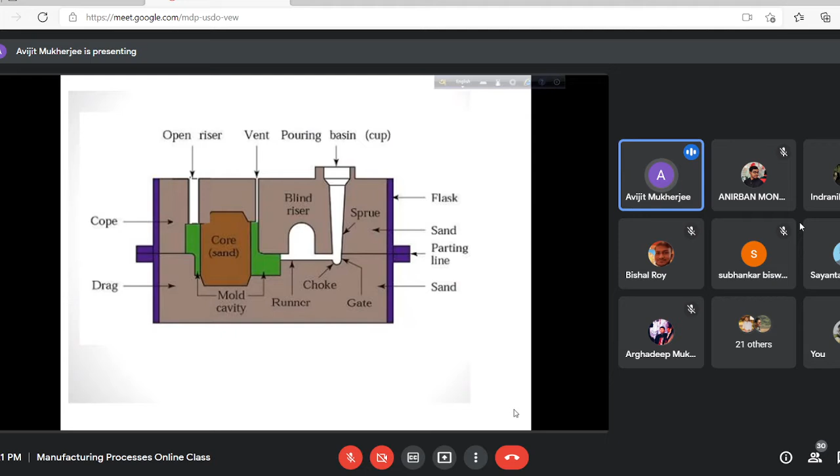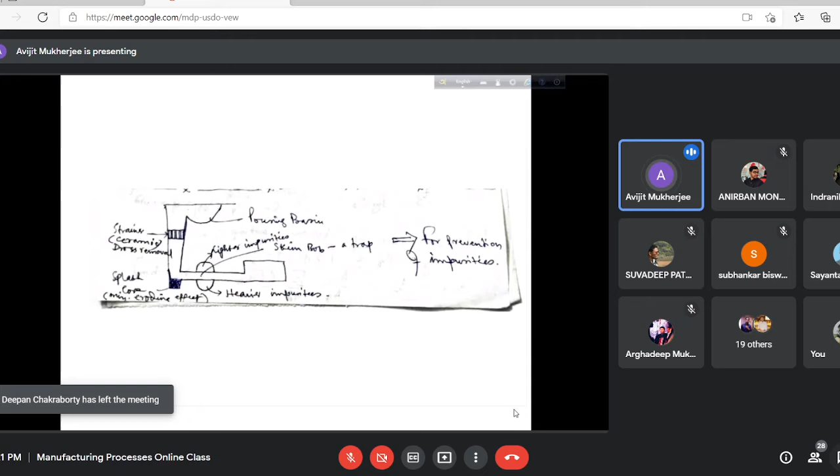So in the last class, most likely, we had mentioned about a figure of gate, is it not? Pouring basin, down gate, ceramic strainer, splash core, skim bob, or whether those were discussed. Yes sir, so one figure was there. So quickly we may also go through that figure. This figure was discussed: the pouring basin, down gate, there is a strainer or ceramic dross removal system.

Dross means oxide, layer of oxide scales, nitride oxide, sulfur oxide, etc. Splash core is provided to avoid the erosion. This is the sprue base well. This is known as this one.

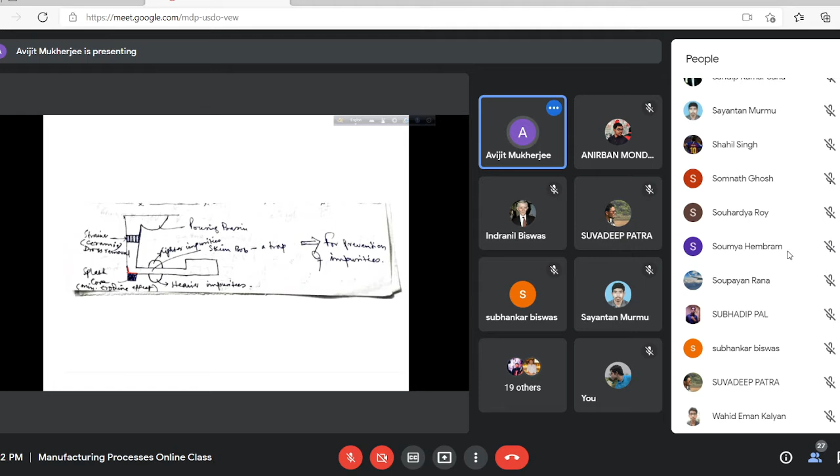Now, if there is a sharp corner, then this portion may be damaged when the molten metal is poured from an elevated height. So it will have a velocity and pressure also. That velocity and pressure will wash out all these particles.

Sand erosion, like say a river bank is eroded by the flow of water in the river. So we provide a splash core. This will minimize the eroding effect, and also during the design, this sharp corner should not be there. So all these sharp corners must have to be curved, so filleting is needed.

At this particular portion, this horizontal part is actually the runner. This is actually the runner, but this is the down gate. This horizontal portion is actually the runner, and there is a trap, a metal trap.

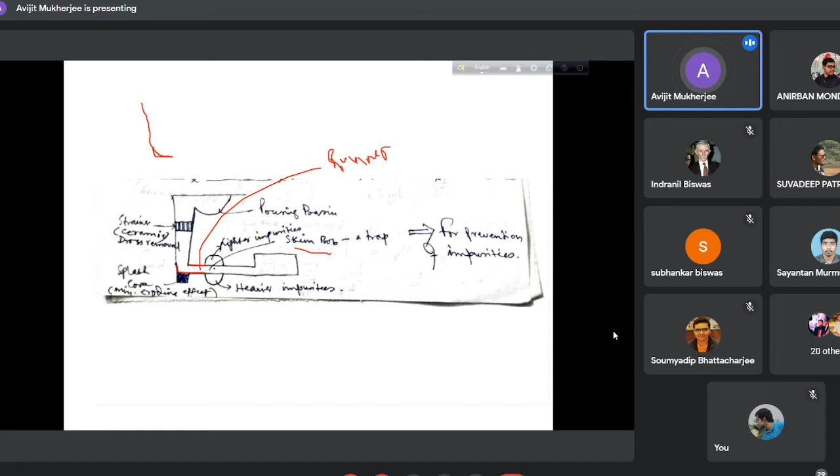It means some lighter impurities will be floated on the upside, whereas the heavier impurities will be deposited on the downside. So this is half circle, another half circle. So this is a skim bob, known as a skim bob. This is a trap of the impurities. Then more purified material is finally entering through this in gate.

This portion is the in gate. So this is the in gate, and this is the cavity. So this is the total gating system.

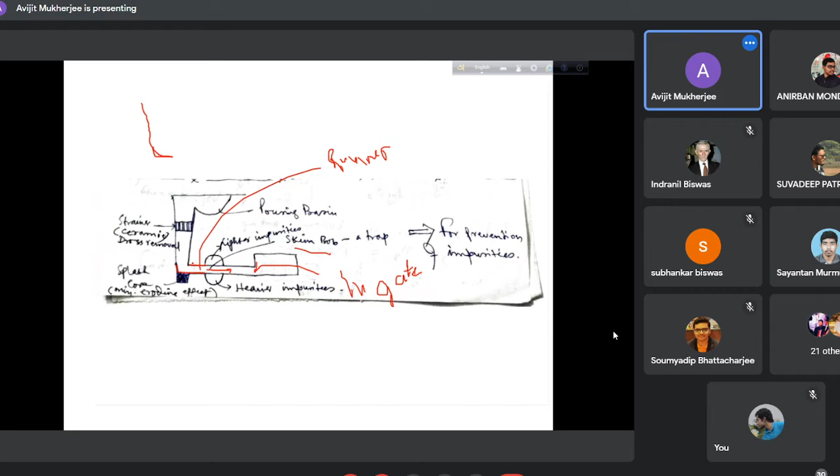But in the figure, when we draw it, we simply label this as a runner, but actually the runner portion is this horizontal one. Okay, so here again a gating system and a riser, mold cavity, all these are shown. There are two boxes, cope and drag, aligned by guide pins, and this is the mold cavity, green color, where a core is there.

What is core again? Today we shall discuss. And this is the pouring basin or cup, down gate or sprue, and there is the sprue base well, also known as sprue base well, where there are the splash core and all these ceramic strainer. This is not shown here. We may have a skim bob here also, which is also not shown, but separately we had discussed.

There is a ceramic strainer, there is a splash core, and there is a skim bob.

For simplicity, we don't draw all these in a single diagram. But if asked to discuss the gating system with a neat figure, you will have to discuss this part: pouring basin or cup, down gate or sprue, ceramic strainer, splash core, sprue base well, and this is the skim bob. Then finally, the ingate.

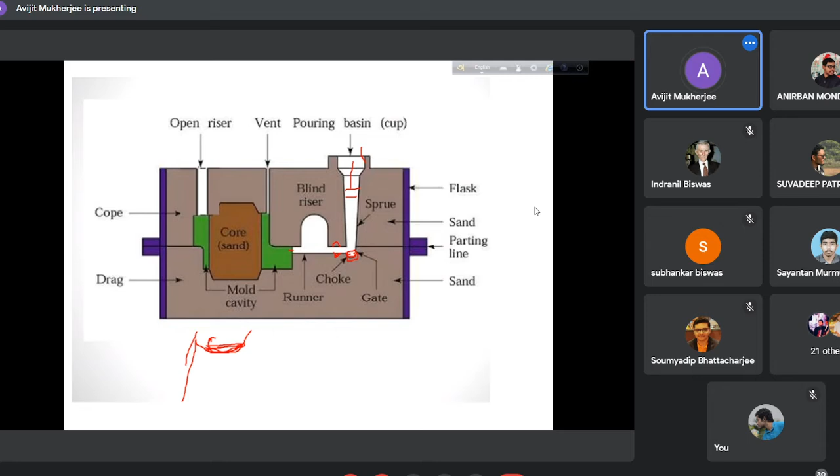Comparatively pure metal will flow here. Then oxide scales will be arrested here, and more pure metal will enter. Again, if some impurities are still there, those will be arrested in this choke area, the sprue base well. But we also provide a splash core in this well—prepared separately using core making sand and placed here—to avoid the eroding effect.

So why is this cup shape always provided? Just to pour the molten metal in the cup so that heavier impurities can be settled. If you pour directly through this space, it will directly come to this area, which is not desirable. That's why I always pour the molten metal in the cup area, and that's why the cup shape is provided.

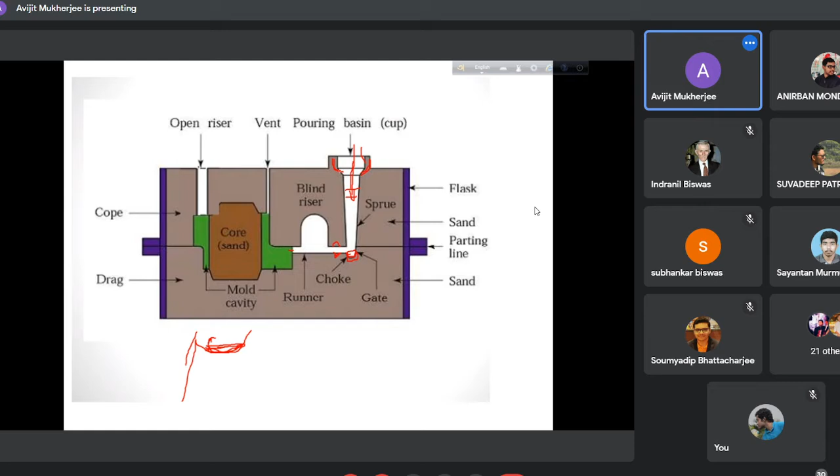In the workshop video, or in the workshops where you are going right now, you will also produce this cup shape, a funnel shape. Now, what is a gate actually? Gate is the passage, the entry point through which the molten metal finally enters into the cavity. That is the gating system, and as we have already discussed, it includes pouring basin, runner, gates, that is ingates, etc.

And these are some important points desired out of a good gating system. What is the requirement? Metal should flow smoothly, because when metal is poured, it will have turbulence. Do you know what turbulence is? If you open a tap in a water basin, a whirling motion will be generated—that is turbulence.

Similarly, if I pour molten metal into the cup or basin, a whirling effect or turbulence will be generated. And if turbulence is there, air or other gases will be entrapped in the molten metal, and finally that will go to the mold cavity, causing various defects due to the dissolved gases.

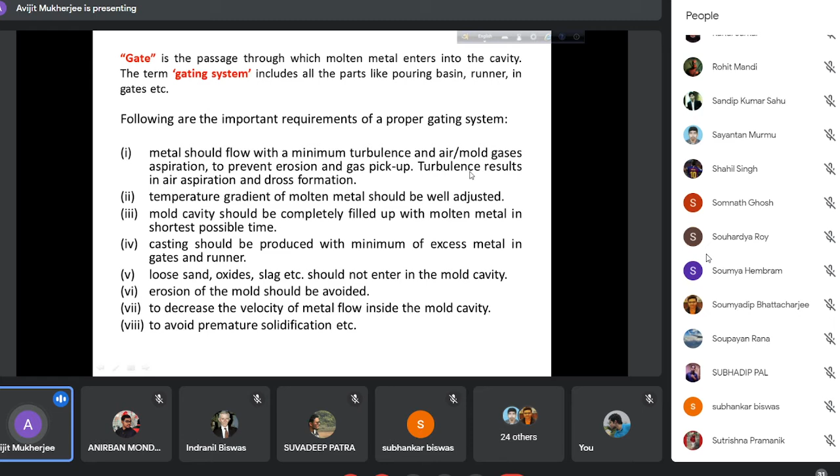Today again we shall discuss the defects. The gate should be designed in such a manner so that turbulence is minimized. Also, erosion is to be prevented, and gas pickup, that is, no extra gas from outside environment should be infused with the molten metal, because turbulence results in air aspiration and dross formation. So these are the requirements of a good gating system.

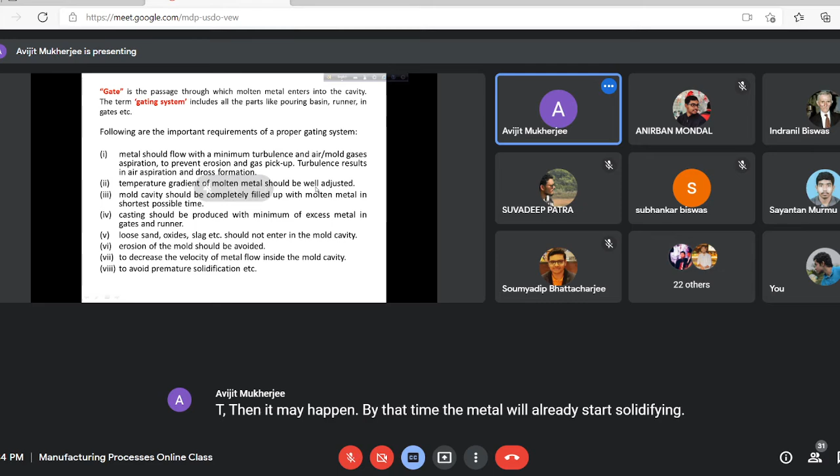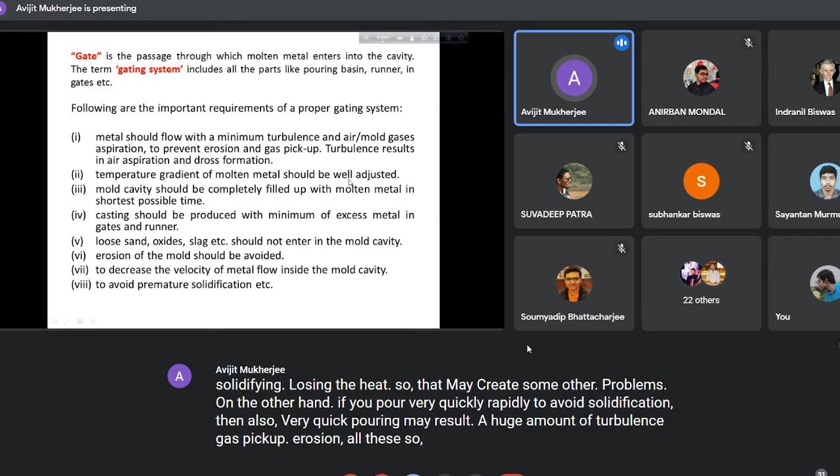Second requirement, temperature gradient of molten metal should be well adjusted. If you pour the molten metal very slowly, then the turbulence will be reduced and chance of erosion will be reduced. But if you take long time to fill the cavity, then by that time the metal may already start solidifying, losing the heat, which may create other problems. On the other hand, if you pour very quickly to avoid solidification, it may result in a huge amount of turbulence, gas pickup, and erosion. So there should be a balance. This is the concept of temperature gradient. The gate should be so designed that this temperature gradient is maintained, that is, not too fast pouring, not too slow pouring - an optimum.

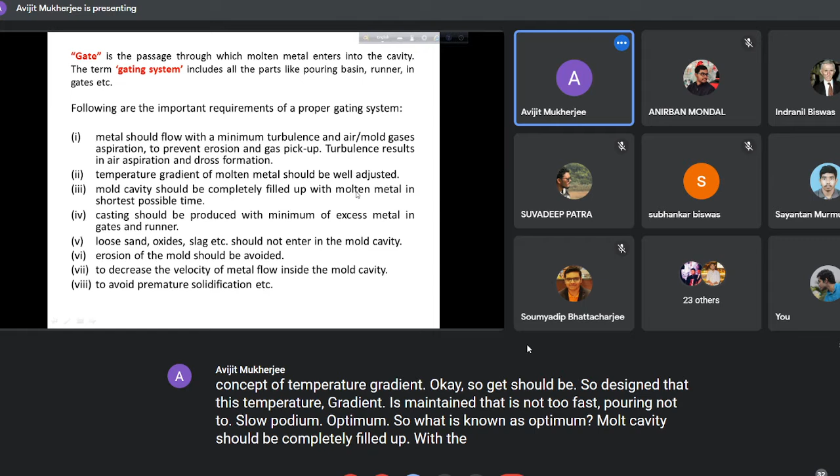Mold cavity should be completely filled up with the molten metal in shortest possible time, but not too fast, because if it is poured very rapidly, other problems like turbulence and erosion will be there.

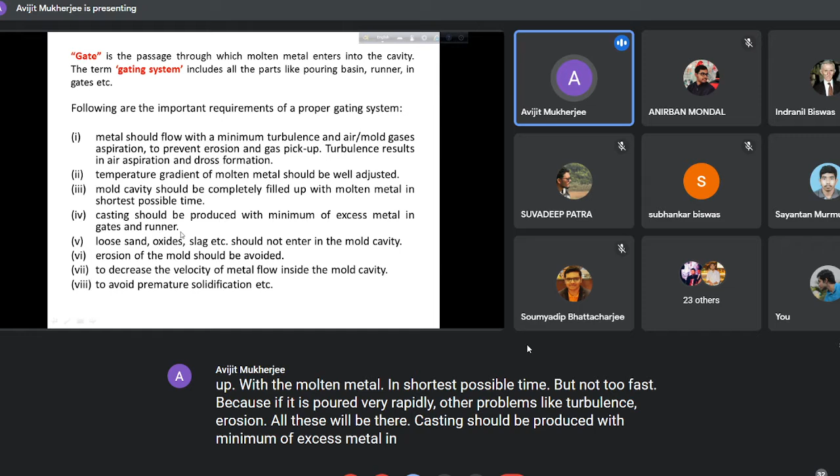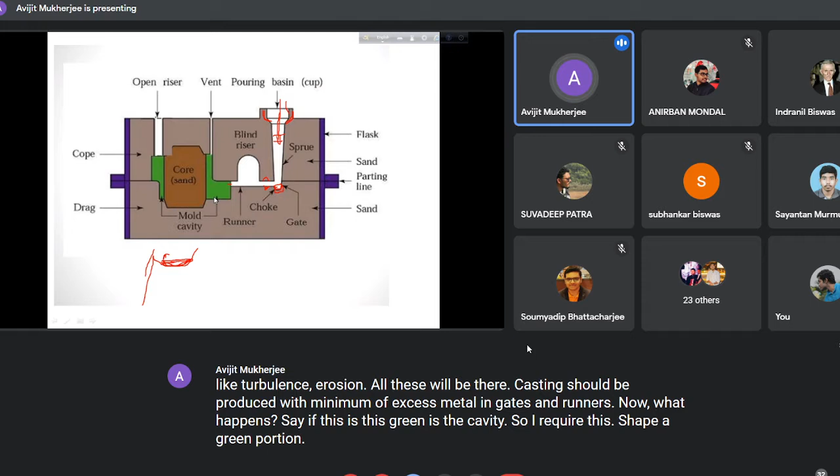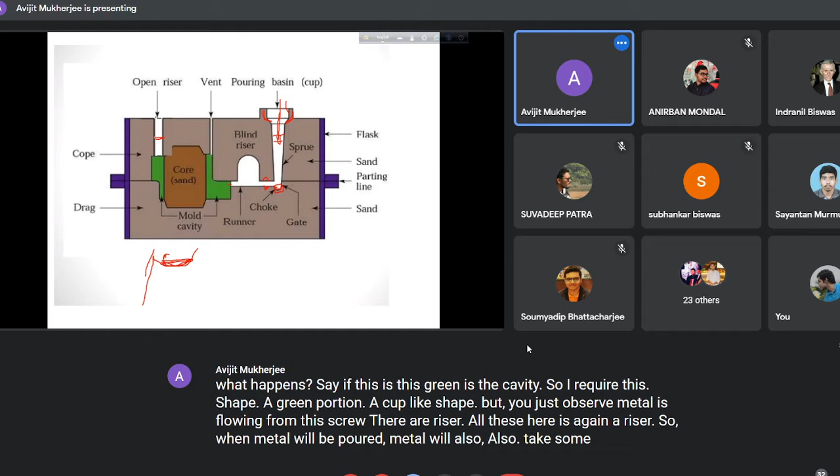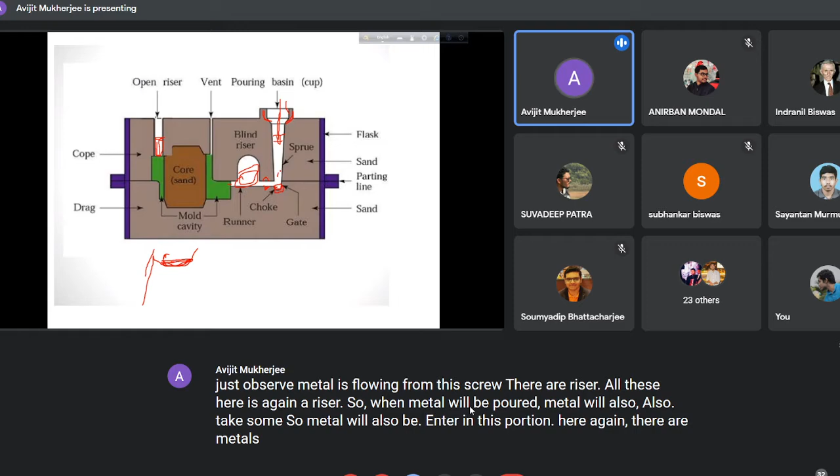Casting should be produced with minimum of excess metal in gates and runners. Now what happens, say if this green is the cavity, I require this cup-like shape. But metal is flowing from this sprue, there are risers, all these. So when metal is poured, it will also enter these portions. So after solidification, along with the main green shape, some other protruded portions will be there, due to riser, gates, etc. So the point is, casting should be produced with minimum of excess metal in gates and runner - it will be there, but it should be minimum.

So after solidification, after the cast is taken out, it will have to be cleaned, breaking the extra material, removing the excess layer of metal, and there are techniques for that.

Then gate should be designed so that loose sand, oxides, slag - slag means where impurities are dissolved and it will float on the molten metal - should not enter into the cavity. For that, we are designing the gate. We have already discussed there are strainers to remove oxide, loose sand and other impurities, which can be minimized just by providing a pouring basin or cup. In the sprue base well, erosion effect will be avoided. There is a skim bob to trap lighter and heavier impurities. So these are the requirements.

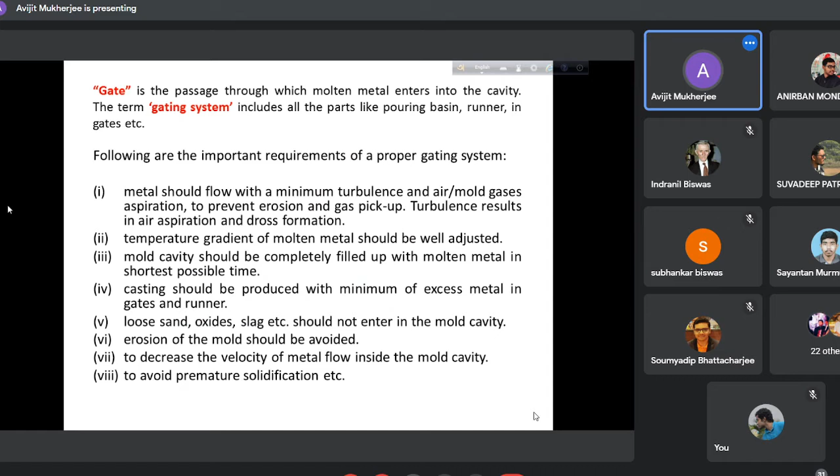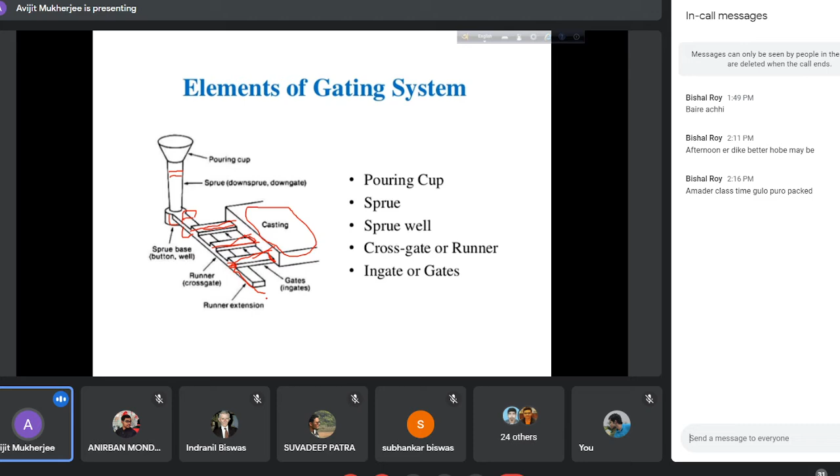Metal is coming, but it may happen, not necessarily. Sometimes this portion may have a gap, a minor gap, so metal will flow totally through this portion but partially this may become void. So if you extend this portion, metal will flow throughout this cavity and easily this channel will be completely filled with molten metal. Otherwise, if it is constrained up to this portion, the total ingate may not be fulfilled, or the flow may be minimized to some extent. That's why this is having some extension.

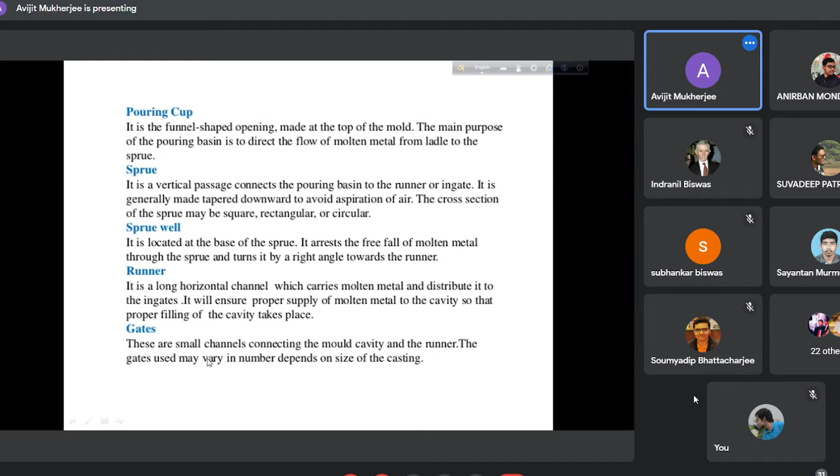So these are again some discussion, all these had been discussed. We have discussed this thing. Now, depending on the position where the gates are provided, there are different types of nomenclature, like a horizontal gating system and vertical gating system.

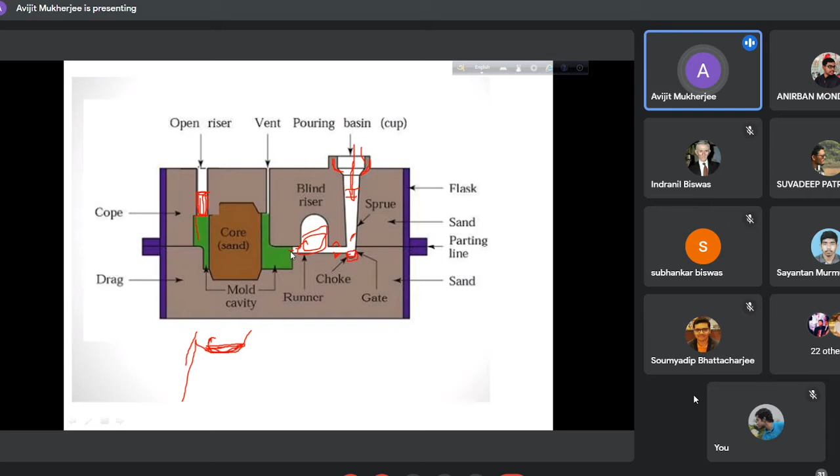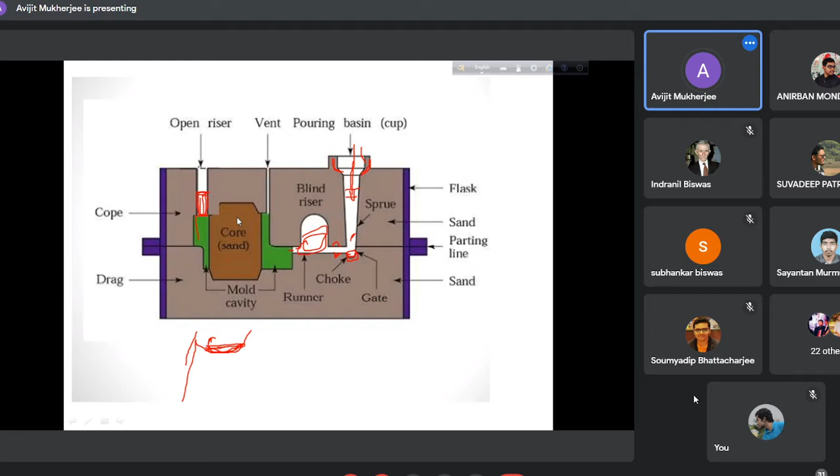This is horizontal gating system because metal is entering horizontally. On the other hand, if this is considered, again this is horizontal, not vertical - metal is entering horizontally here. But sometimes metal may be poured directly from the top, not in this figure, in some other cases. That is the vertical gating system. So depending on the position or orientation, it may be either horizontal or vertical gating system.

And you know what is parting plane. If I have cope and drag, say cope half and drag half, then this plane is known as parting plane. So if the gate is provided horizontal to the parting plane, that is horizontal gating. On the other hand, if the gate is provided vertically, it is entering vertically. So with respect to the parting plane, either horizontal or vertical.

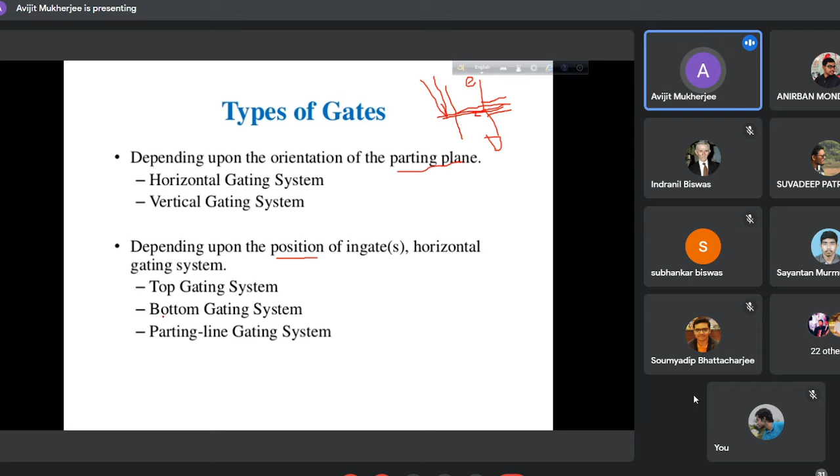And also, depending on the position, it may be top gate, bottom gate, or parting gate. What is that? Say this is the mold cavity, and metal is flowing or entering from the top. This is the pouring basin, down gate, sprue base well, and it is entering in the cavity from the top. This is the parting plane, so it is entering at top - that's why this is known as top gate.

Sometimes this may also be the figure - top gate, this is horizontal, that is vertical, it can be a vertical gate. But this is not desirable sometimes. So this is top gate because it is entering the cavity from the top of the parting plane.

Here, same figure, same arrangement, but metal is entering from the bottom - so that's why this is bottom gate. And here again, same cavity, but metal is entering at the midpoint, at the parting plane. This is the parting plane, if it is divided in two equal halves - cope half, drag half. So the gate entry point is provided here at the parting line, so this is known as parting gate.

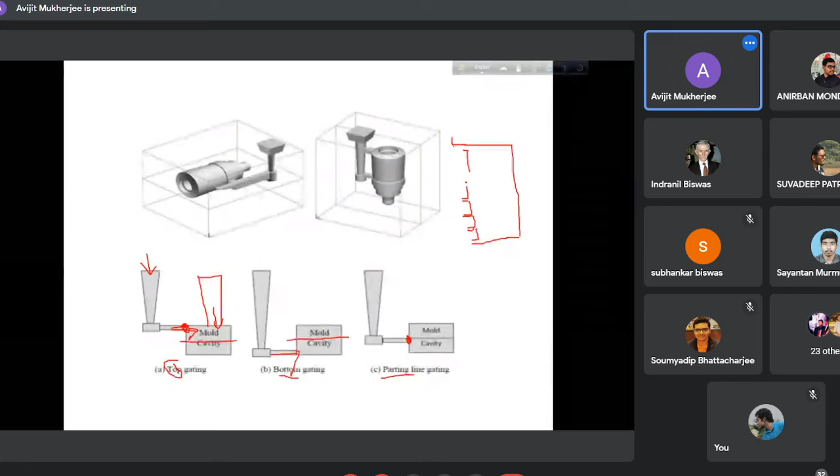So, if the thickness of the casting is very large, then only top gate, or only bottom gate, or only parting plane gate may not fill the cavity very systematically. In that case, a number of ingates are provided throughout the height of the job or cavity. That is the concept of step gates, like the steps of a staircase - so these are known as step gates.

So we have top gate, bottom gate, parting gate or parting line gate, and step gate.

So, after solidification, how does it look like? This is the gating system, mold cavity. So when the metal will be solidified, all these portions we shall discuss with a figure. Just a minute.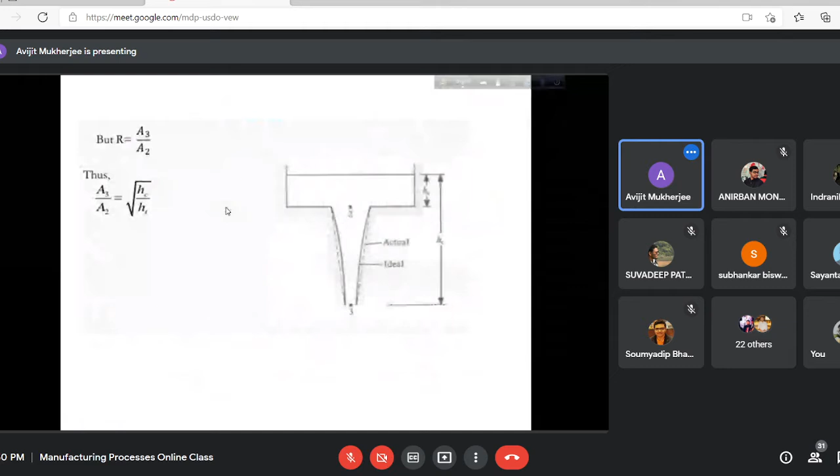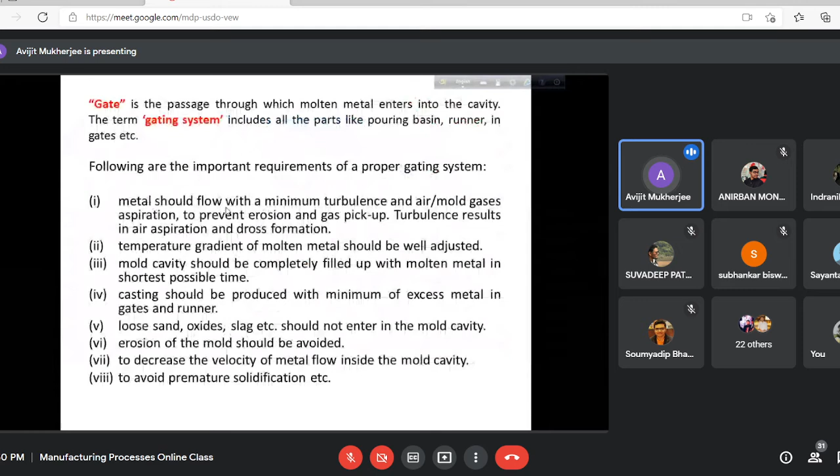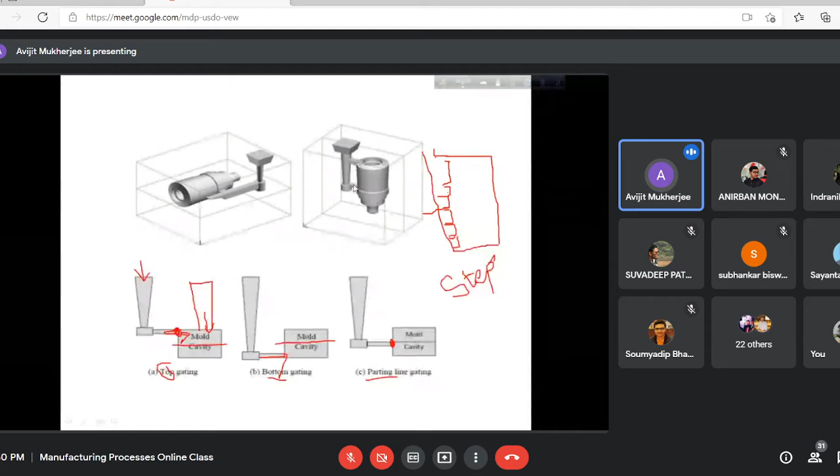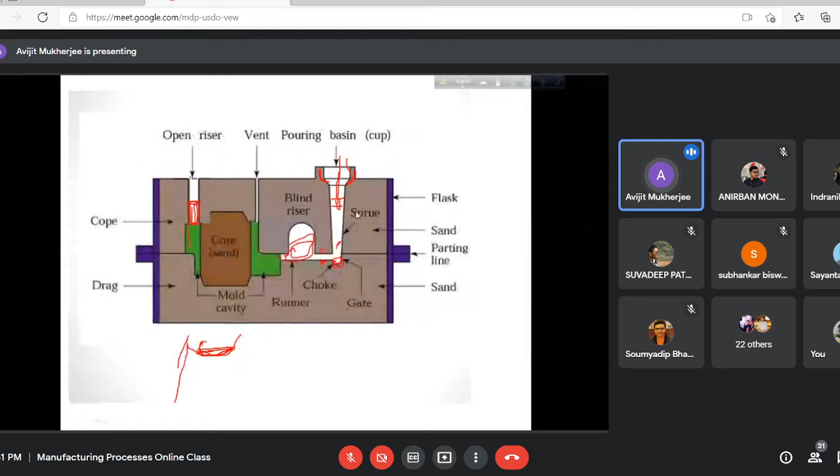And again, we have a concept known as gating ratio. Gating ratio is nothing but AC is to AR is to AG. What are those? It is the area of the sprue base well, or choke. Just remember the choke here, sprue base well. Cross sectional area of this sprue base well or choke is to AR, total cross sectional area of the runner.

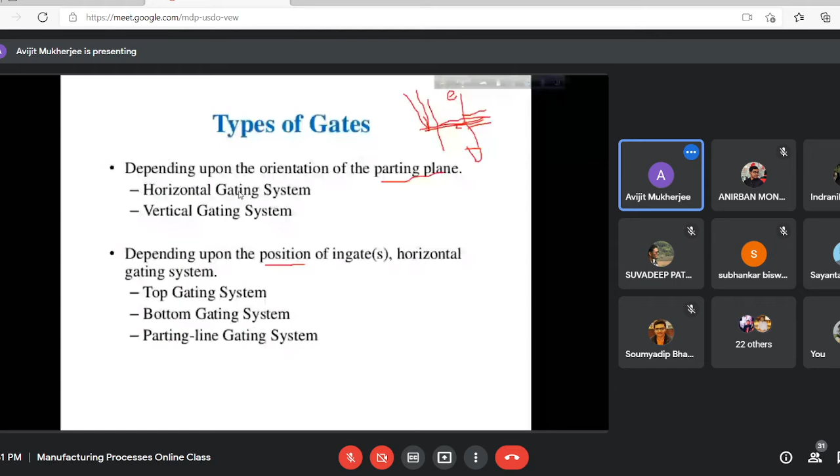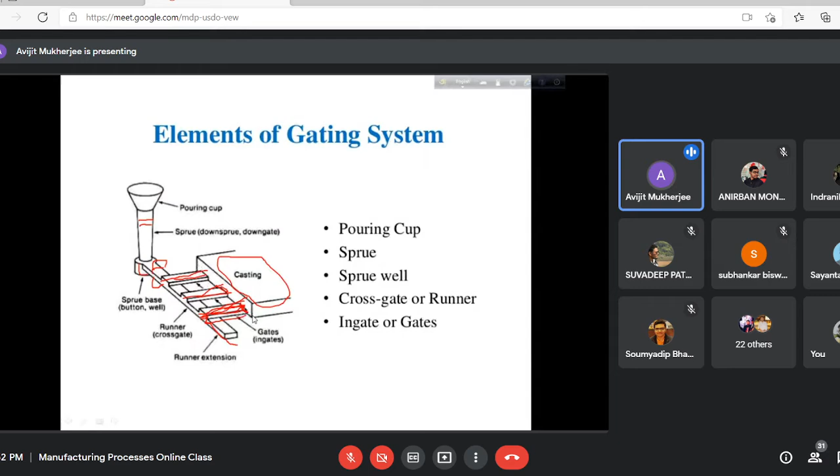Total, not a single. Choke area is a cup like shape. So cross sectional area of the choke is to cross sectional area of the total runner is to total ingate, cross sectional area of the total ingate. If I have three ingates, each having cross sectional area small a, so 3a will be the ingate area. So this ratio is the total choke area is to total runner area is to total ingate area.

And what is the meaning? If the ratio is like this, say total choke area 1, total runner area 2, total gate area 1, or 1, 0.75, 0.5, this is a pressurized gating system. Pressurized means you observe the in-gate area is 0.5, but on the back side of this in-gate there is runner and choke where area is much higher. So more metal is accumulated, and they are applying pressure on the smaller in-gate area. So that is pressurized gating.

So if the total gate area is smaller than its predecessor, that is runner or choke gate, then this is called a pressurized gate. Here also, total in-gate area 1, immediate predecessor, that is runner, is having more cross-sectional area, so these are pressurized gate. On the other hand, if the ratio is 1 is to 3 is to 3, or 1 is to 1 is to 3, this is a non-pressurized or unpressurized gating system. No back pressure is existing.

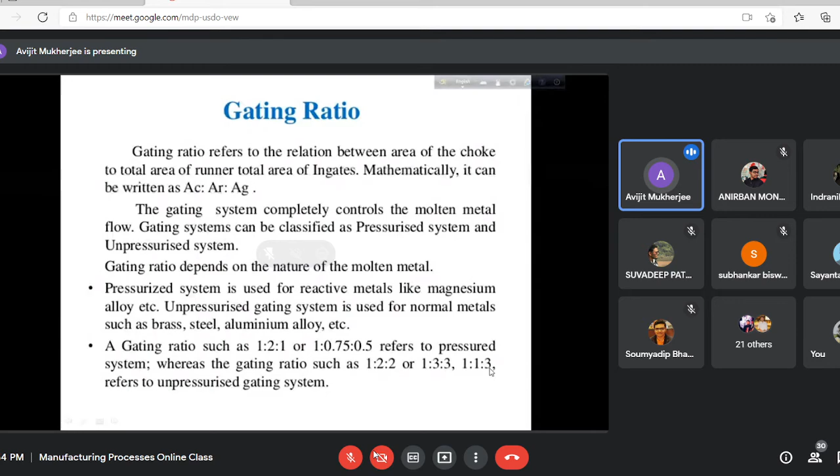So depending on pressurized and unpressurized, what happens? Pressurized gating system is associated with more increased velocity through the gates, but that will ensure the flow of metal very nicely. On the other hand, if it is unpressurized, then the metal may be stuck in the gate, it may not flow very smoothly. And also, whether it is to be unpressurized or pressurized depends on the type of metal.

Normal metals, that is non-ferrous, brass, steel, aluminium, etc., which are normally used, they use unpressurized, that is gates are larger in gate. Whereas some pressurized system is used for magnesium alloy, some reactive material, or some material where it is required to have a pressurized system. So this is nothing but to control the flow of molten metal inside the cavity, pressurized and unpressurized.

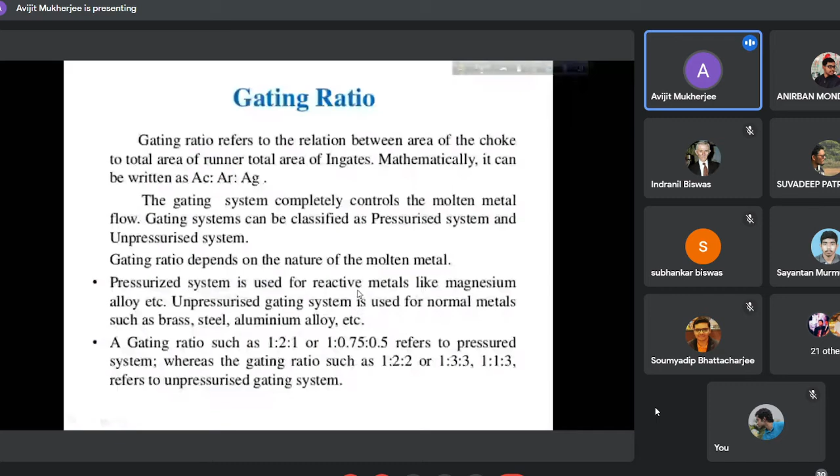So what are some advantages, and these are mentioned. Pressurized controls the flow, unpressurized is a choke control system. In pressurized, metal velocity is high, as I have mentioned, and also turbulence will be there due to high velocity. In case of unpressurized, turbulence is reduced and streamline flow is induced.

Pressurized system consumes less metal because I am forcing metal to enter into the cavity. So these are some advantages and disadvantages. As I have mentioned, in case of unpressurized system, flow is not full because metal will be stacked in front of the gate, it may not flow into various intricate carved portions.

Like the other day, during our centrifugal casting, we had mentioned there was a die casting system where some pumps were used to force metal, and if pumps are used or centrifugal force is applied, the metal will flow to fulfill each and every nook and corner of the shape. Similarly here, if it is a pressurized system, then every nook and corner will be fulfilled by the metal, but if it is unpressurized, it may not be so.

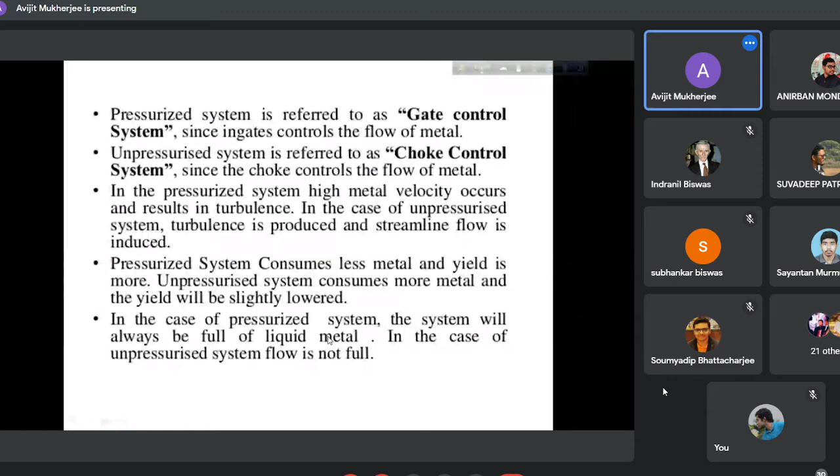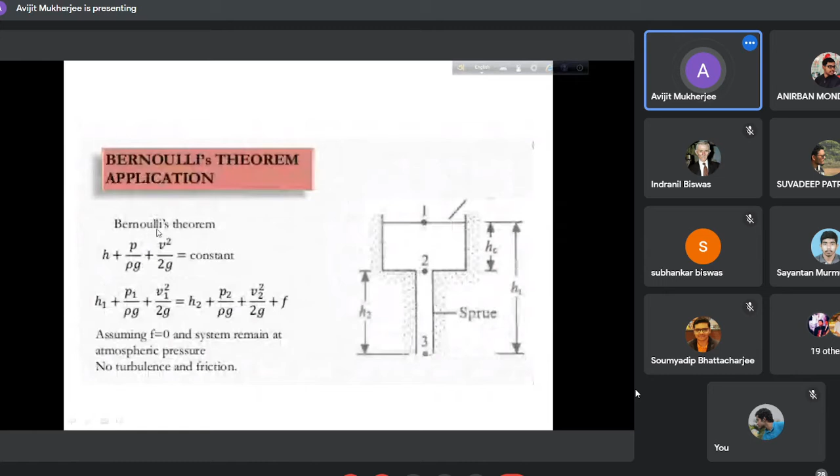Another theorem is continuity of mass flow, that equation. Continuity, because the concept is same amount of volume remains constant. So total fluid entering here at point 1 will remain the same at point 2 and point 3. That is the continuity, volume constancy. Volume remains constant.

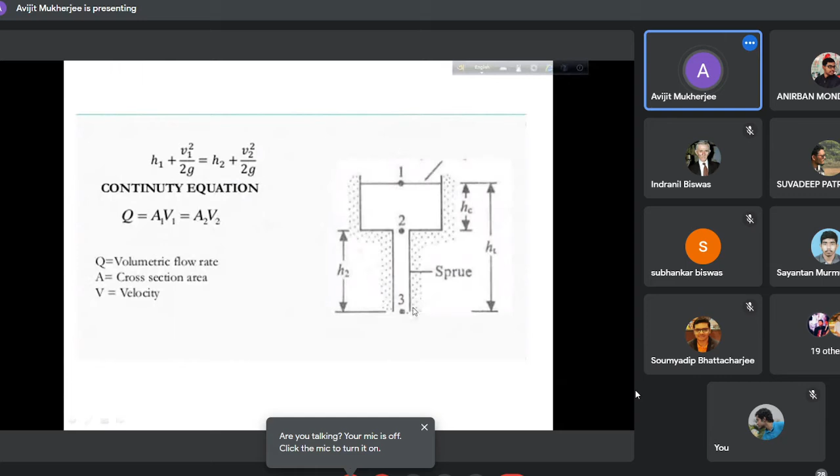So Q is the volumetric flow rate. Volume Q1 equal to Q2, volume at point 1 equal to volume of fluid at point 2. And Q is given by cross-sectional area times its velocity. Cross-sectional area say centimeter square and velocity is centimeter per second. So continuity volume flow rate is centimeter cube per second. That's why the formula is A1 V1 equal to A2 V2 equal to A3 V3 and so on. So this equation is also applicable.

So Bernoulli's theorem, continuity equation, and the same thing applying Bernoulli's equation at 2 and 3 as we have mentioned. If P2 and P3 are not same, then we may obtain all these equations from continuity equations. So in this way, there are so many mathematical juggleries. All these are nothing, we can develop so many mathematical models.

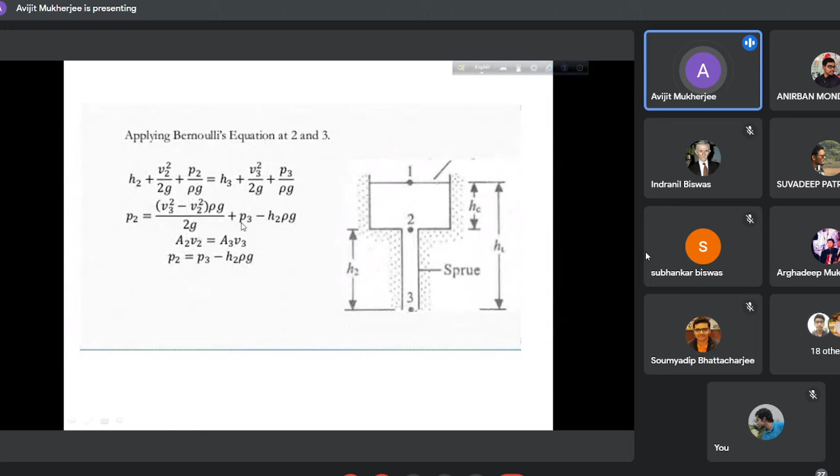Again, same thing. If we consider atmospheric pressure, here P2 and P3 are not considered as atmospheric, so it's different, and accordingly we have developed something. But if P2 equal to P3 equal to atmospheric pressure, then those terms can be removed, and accordingly we may get all these.

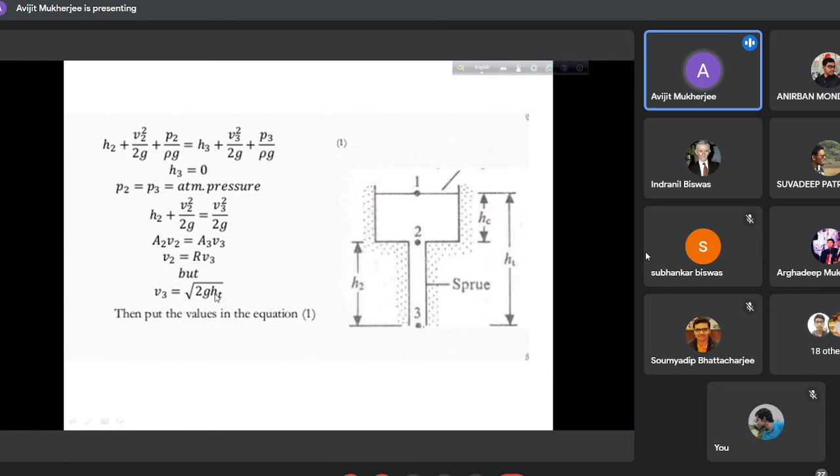So what I would like to say is gate is not a very simple part. There are so many design considerations, but we shall not discuss in detail. Sometime during your third year, fourth year, there will be some projects, major project or minor project in your curriculum. During that case, you may develop something on this, so that is the possibility. Okay, gate design.

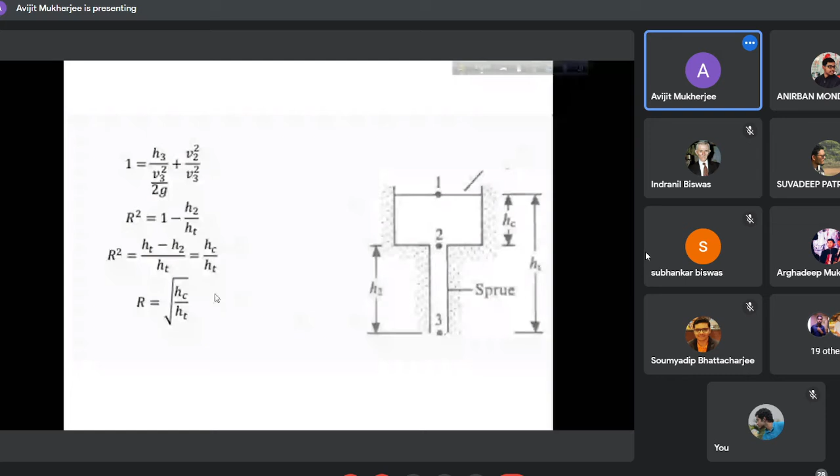Again, all these I am not discussing in detail. Just think, you should remember that during gate design we are considering Bernoulli's energy equation theorem, energy balance, continuity equation, as well as Reynolds number, which is also important. All these are the basis of fluid flow. What is Reynolds number? This is important because it will give you an indication of turbulence. Turbulence is very important to consider, because turbulence may erode the various mold cavity and all these. Air aspiration is also associated with turbulence.

So that's why it is very important, and it is associated with a number known as Reynolds number. So how is it given? Reynolds number is given by V d rho by eta, where, it may have some other expression, but in this case it's the same thing, the legends may be something different, but the meanings are the same.

V is the velocity of the metal or fluid that is used. In our case, we are interested with metal, so metal in molten state is the fluid, that is the velocity of the fluid. And d is the diameter of the duct through which it is passing, sometimes represented as phi, so d is the diameter through which the metal is flowing, that is the diameter of the sprue say. And rho is the density of the fluid. And eta is viscosity, a viscous means something which will give some frictional drag, so viscosity of the fluid is eta.

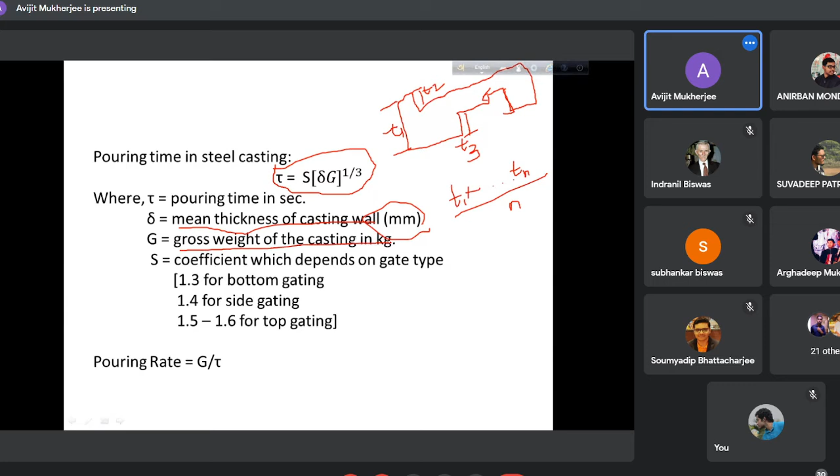And G is the gross weight of the casting in kg. And S is a coefficient which depends on the type of gate. If it is a bottom gate, S is 1.3, for side gate 1.4, and top gate 1.5 to 1.6, for steel casting. If it is aluminum, these values may be different.

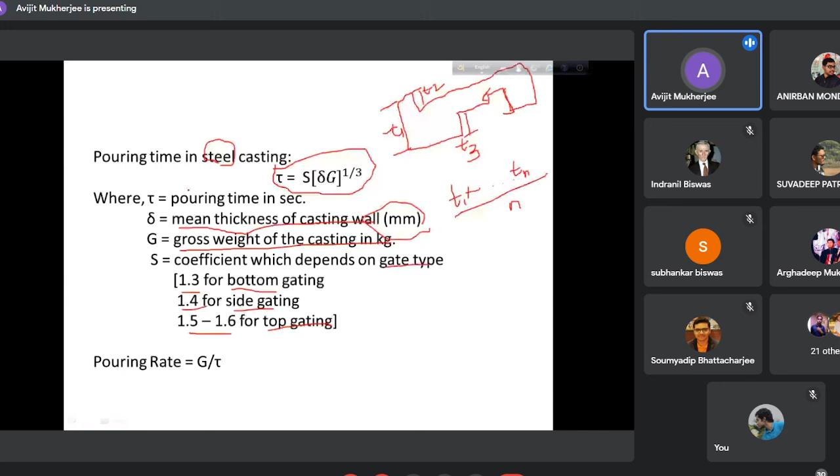And pouring time, tau. So pouring rate, what is the rate? Total weight divided by pouring time. So that is the rate. So all these are important considerations in case of gate design: Bernoulli's theorem, continuity equation, Reynolds number, pouring time, etc.

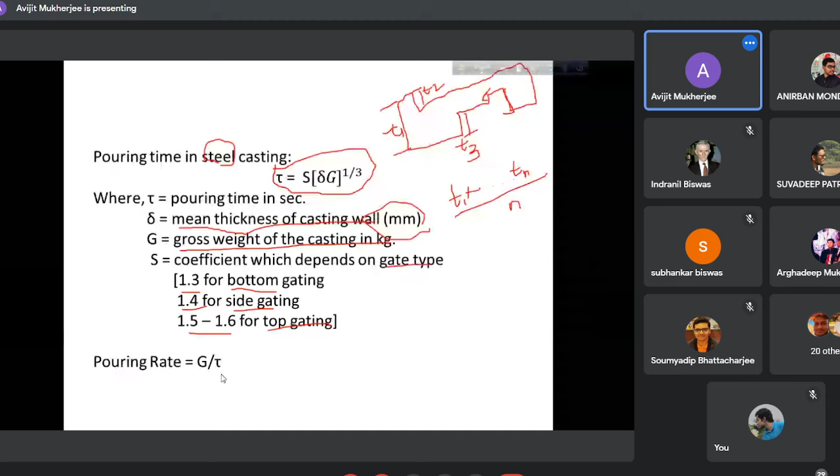And then riser. Now, before discussing riser, do you want to have some 2-3 minutes break, or should we continue?

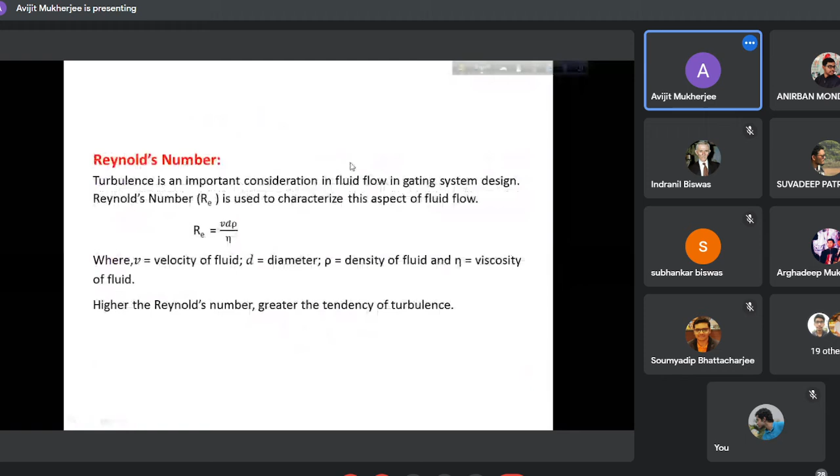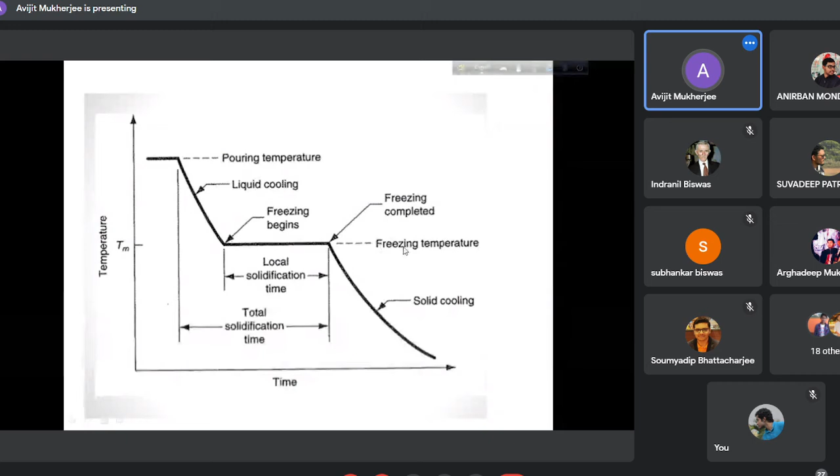Very important to note: risers marked with an asterisk are not that effective for materials having a larger freezing range. You know what freezing range is - from molten metal, cooling, then freezing starts, freezing stops. So if this freezing range is too long, risers will not be effective because all the metal will solidify completely, so risers may not be so important in those cases.

Risers are also not needed where the cavity is filled up by molten metal with pressure - a pressurized system, like in pressurized casting or centrifugal casting, which is one special type of casting. Another example is gravity die casting - when it's only gravitational force it is not foolproof, but when some pressure is applied, a goose neck was used. So in case of pressure die casting, or when molten metal is forced to enter the cavity, risers are not that effective.

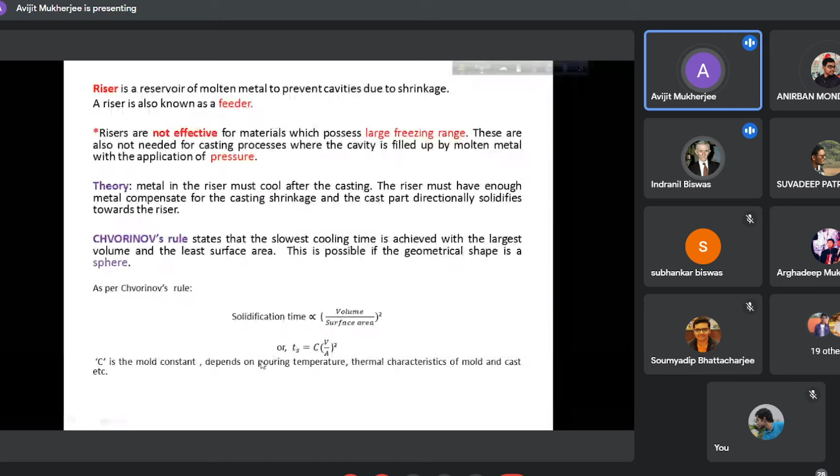How do we utilize this formula? Later on, I shall tell you.

Now, another concept is efficiency or yield of a casting. What is efficiency or yield? It is the total weight of the cast part divided by the amount of metal poured - total weight of the cast part, and how much material was poured to achieve that cast part. So this is the efficiency.

Needless to mention, when we consider risers and runners, all these will also solidify along with the mold cavity, so the extra weight must be reduced. Let me show a real life casting - my required casting is this part, but I must provide a riser here, and these are the gates, sprue basin, down gate, and all these. So though my requirement is just this part, after solidification so many other things come along - sprue and risers, various risers, this runner, all these - so the total weight is very high.

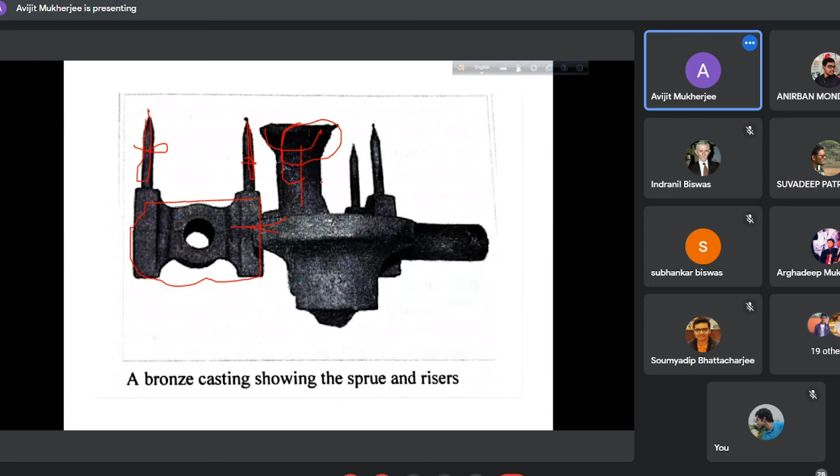As a result, efficiency will be reduced. So the target is to design the system to minimize the riser, runner, and all this - that is the optimization here. When risers are used, total weight may be more, so it is important to optimize their size and shape.

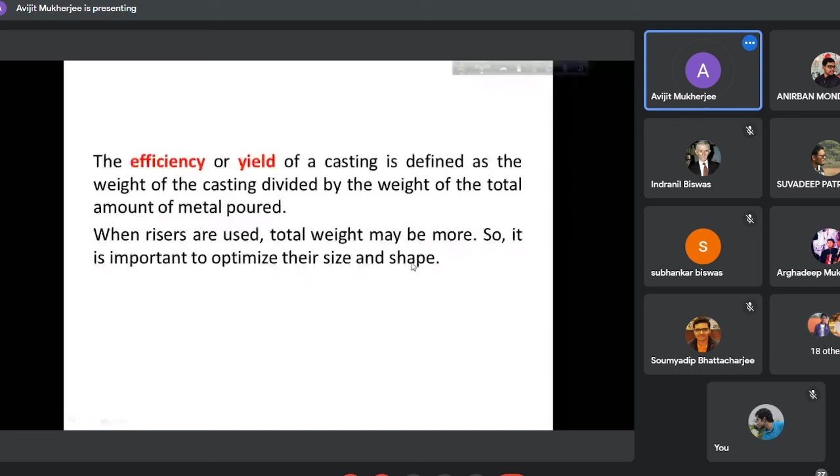As we had discussed gates - top gate, bottom gate, parting gate - here also, based on the position and nature of the riser, we may divide risers into various categories.

Top riser: if the riser is placed on the top surface of the cast part cavity, it is called a top riser. But if the riser is placed by the side instead, this is known as a side riser.

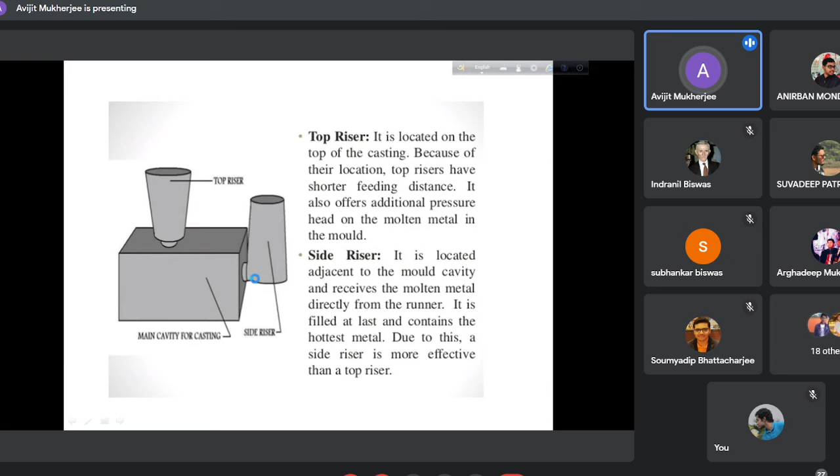Again, if this is the top riser and the upper face is open to the atmosphere, it is known as an open riser.

Here, if I draw a figure like this - this is a side open riser. Is it clear? Top blind riser, side open riser, top open, and so on.

Open, blind, side, top - another pair are live riser or hot riser, and dead riser or cold riser.

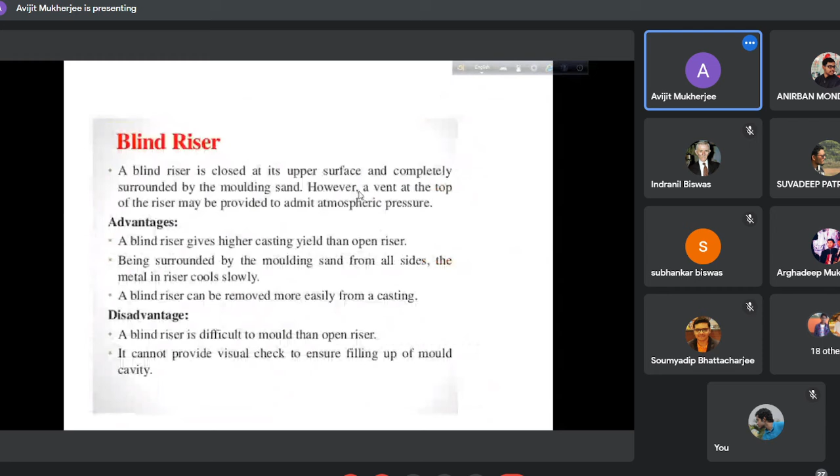You just observe here: if this is the riser, molten metal is poured here. As molten metal enters, it will fill the entire cavity, and at last this cavity will be filled. So at the end of the pouring, molten metal will enter the side riser last, and since it is entering last, it will remain hot.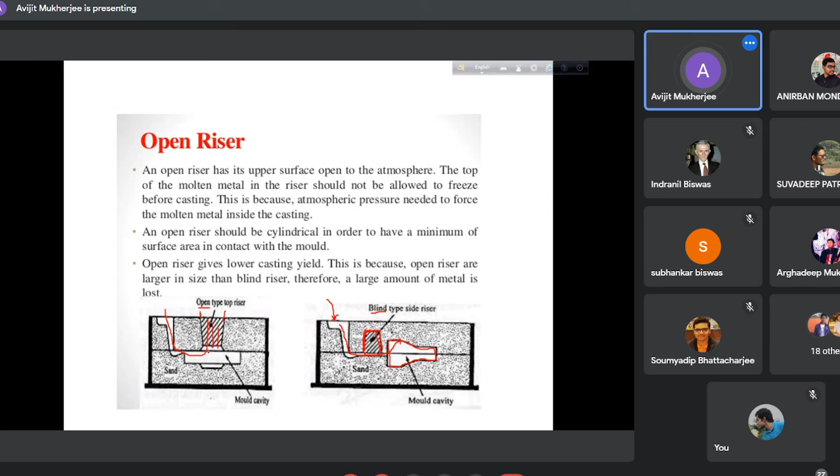That's why it is called a live or hot riser. On the other hand, if this is the situation, as soon as molten metal is poured here, it will flow and the riser will also be filled by the molten metal at the same time. So when the entire cavity is filled with molten metal, by that time the riser is already filled with metal, and it will lose some heat - its temperature will come down to some extent.

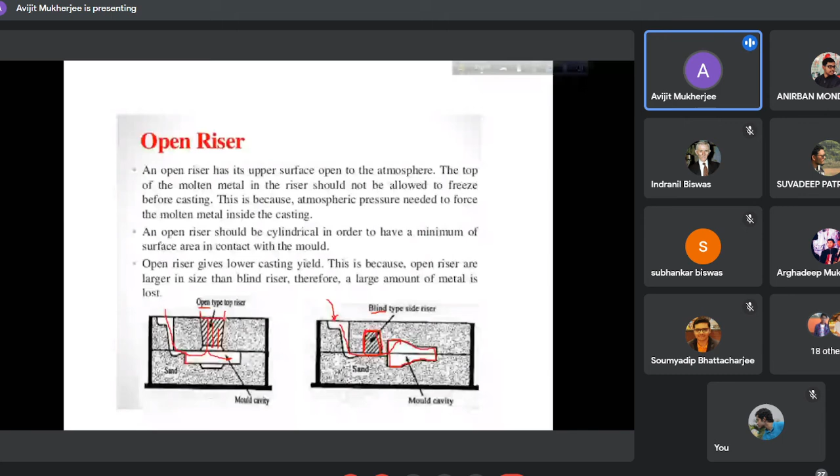That's why it is called a dead riser or cold riser. Generally, top risers are dead or cold risers. So we have six types of risers: side, top, open, blind, live or hot, dead or cold.

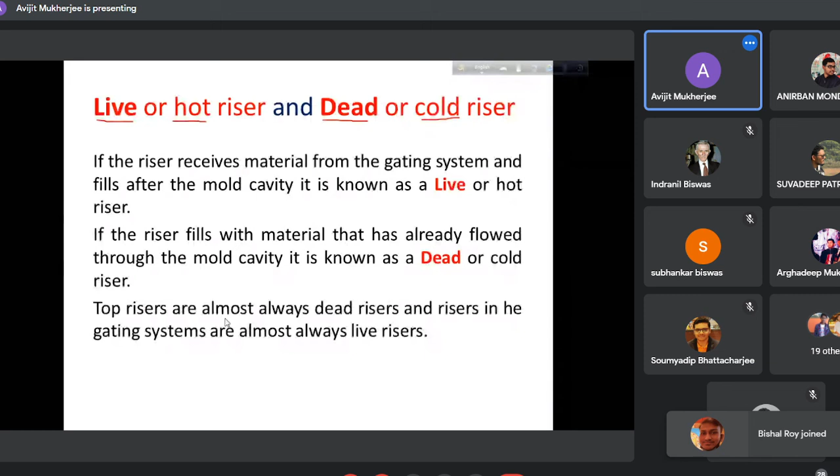But as we have mentioned, generally top risers are dead type of risers, dead or cold risers.

But sometimes, to ensure that the top risers are provided with hot molten metal, for some specialized casting we may use a part which is known as hot tops. This is also a sort of riser. Hot tops - what is that?

Hot tops are also a provision for the riser, and metal is poured here. This is the cavity, so when molten metal is flowing, it is also entering in this riser.

As this is a top riser, it will become a cold or dead riser. When the total cavity is completely filled up with molten metal, then you insert a pre-prepared riser. The riser is prepared separately outside, using a ceramic liner. So this is a special material, and you place this ceramic liner part, that is the hot top, and then pour extra material.

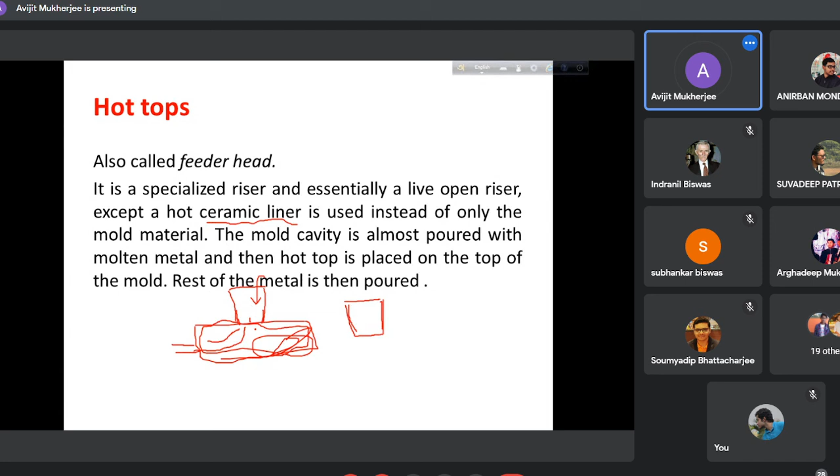So instead of preparing the riser along with the mold cavity by ramming the molding sand using riser or runner pins, that is sprue pins, we prepare a ceramic liner riser separately. When pouring is almost complete, we place this ceramic liner hot top, and molten metal is filled in this hot top. As the liner is ceramic and molten metal is poured last, it remains live and hot.

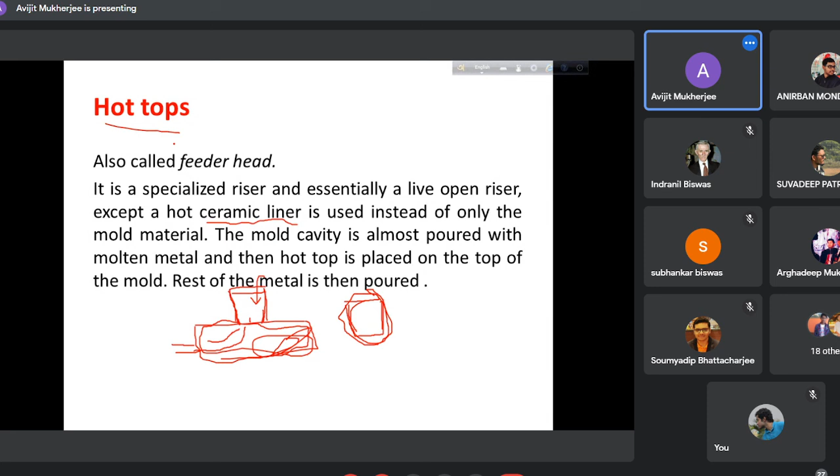Now take this problem on riser. Three pieces of metal being cast have the same volume but different shapes: one is a sphere, one is a cube, another is a cylinder. What is that cylinder? A condition is given: the height of that cylinder is equal to its diameter. It may not be so, we may have some other geometrical sizes also, but here it is given. Now, which one will solidify the fastest and which one will solidify the last? You may consider many techniques, but here the task is to discuss considering the solidification time of each.

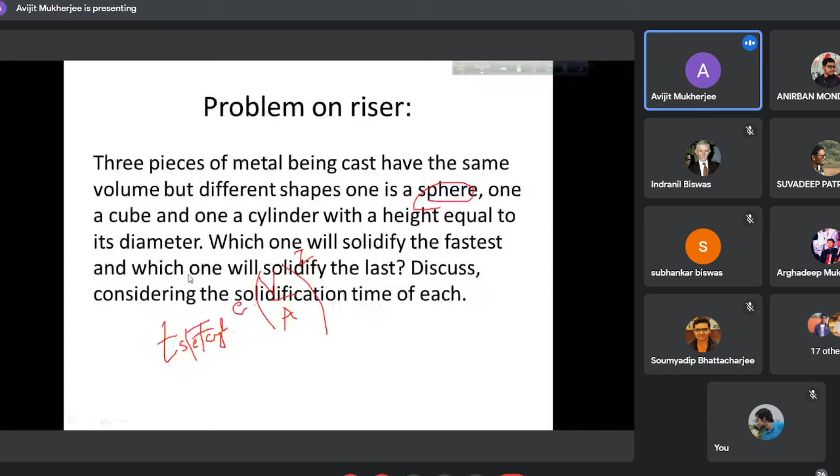Have you got this, or should I send this problem via the chat box?

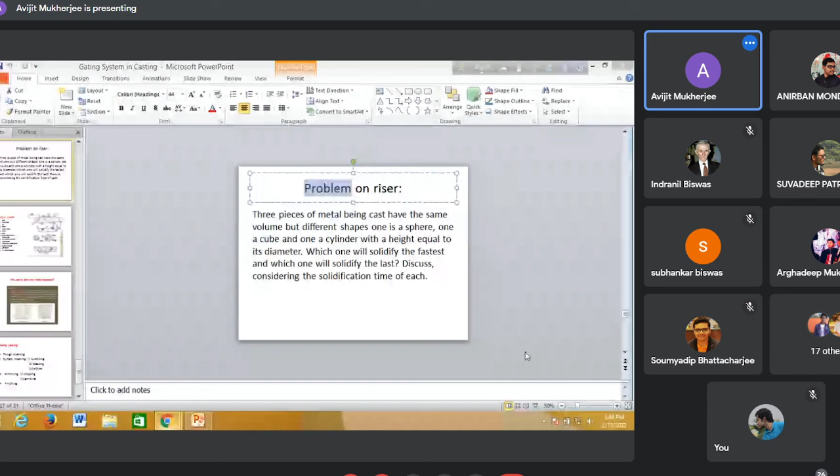Now we shall discuss some casting defects, and with this we shall conclude today. Up till now we have mentioned the green sand molding technique, some precision or investment casting techniques like shell molding, lost wax process, ceramic molding, carbon dioxide molding, all these techniques were there. We also discussed some special castings like mechanized die casting, gravity die casting, centrifugal casting, centrifuging, etc.

All along we have mentioned, time and again, various defects. So what may be the defects? If you go through any book, you will find many more, not only this limited few that are observed here. Only a few defects are written here, but those are the important defects. If you go through books, you will find so many others also, but these are the important ones. What are those?

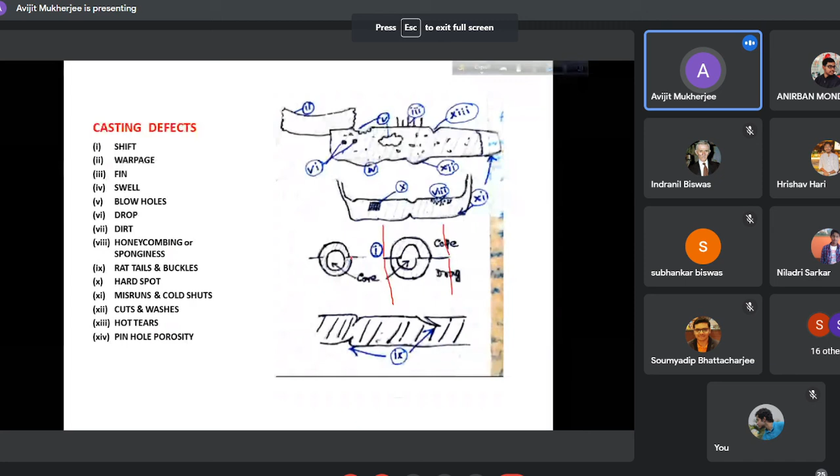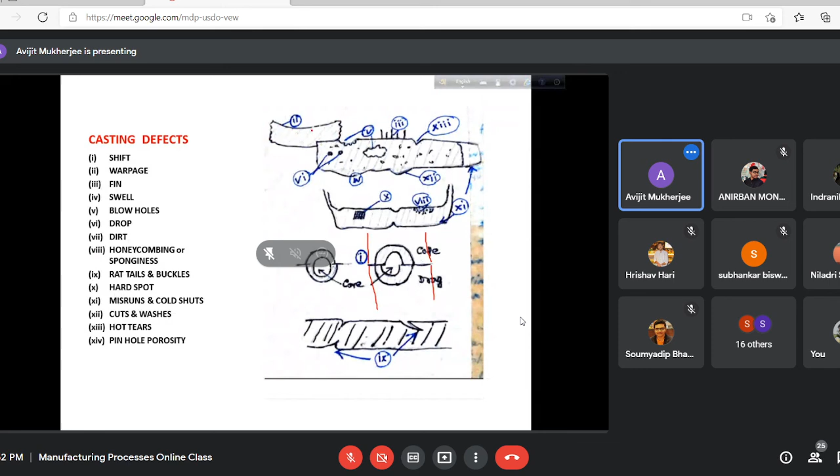Second is warpage. So what is this one? Now, if the solidification or cooling is uneven, then this type of bending or distortion in shape may result.